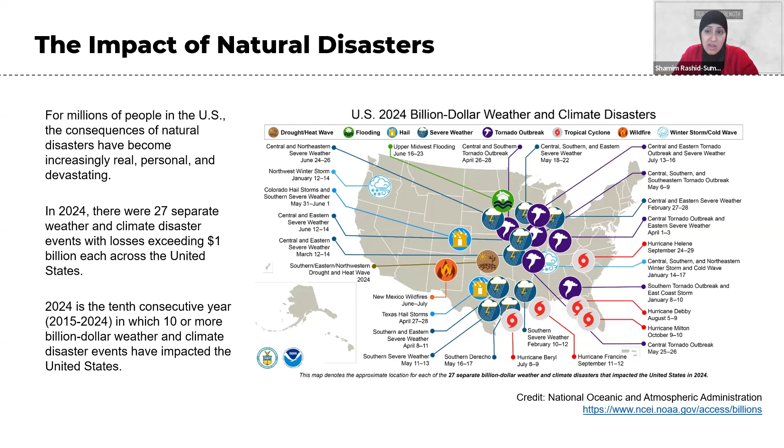There have been several years with 10 or more separate billion-dollar disaster events, including as far back as 1998, 2008, 2011 to 2012, as well as this 10-year period from 2015 to 2024.

However, across that last 10 years, 2017 was the costliest year on record for natural disasters in the United States, with a price tag of $306 billion.

In 2017, that was the year Hurricane Harvey broke a rainfall record for a single tropical storm with more than 4 feet of rain in Southeast Texas, and it matched Hurricane Katrina as the costliest tropical cyclone on record.

2017 was also the year Puerto Rico was mired in recovery after Hurricane Maria, and about 3,000 people were estimated to have died in that storm and its aftermath.

So we're going to talk a little bit about these different types of disasters and how each of those impact in the bigger picture. When we talk about wildfire, I have some statistics here on the cost of wildfires in the United States.

According to Verisk Insurance Solutions, just under 5 million US homes are at high or extreme risk of wildfire, and about 2 million, nearly half of those, are in California alone.

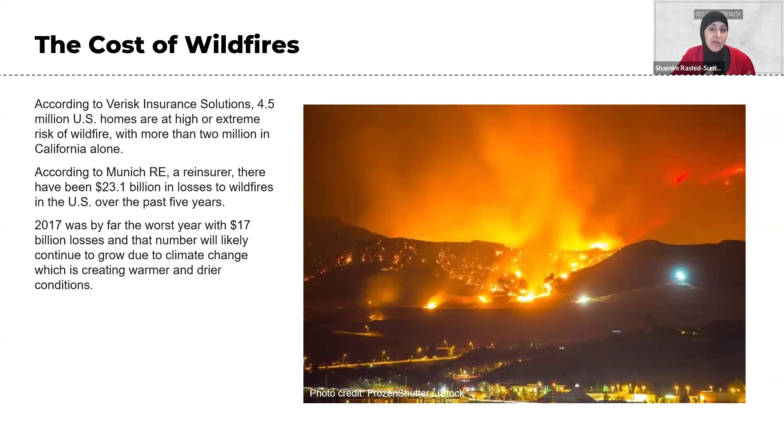It's estimated that that loss will continue to grow as we continue to experience different climate patterns, which create warmer and drier conditions year on year.

And so we continue to build in fire-prone areas. As we continue to do that, the damages caused by wildfire in those fire-prone areas will continue to increase. It's interesting that we continue to build back after wildfires.

Sometimes, instead of building back to higher standards, we see that policymakers will issue permits to rebuild without updating to the latest building codes, and sometimes exempting residents from zoning rules so that they can build larger homes and build back more quickly. Sometimes state officials have even mandated that insurance companies not raise insurance rates for people in fire-prone areas.

That means it just passes the cost on to homeowners elsewhere outside of those fire-prone areas. We've seen more recently an even bigger problem in that insurers will refuse to insure homes in hazard areas at all, and that's becoming true as well.

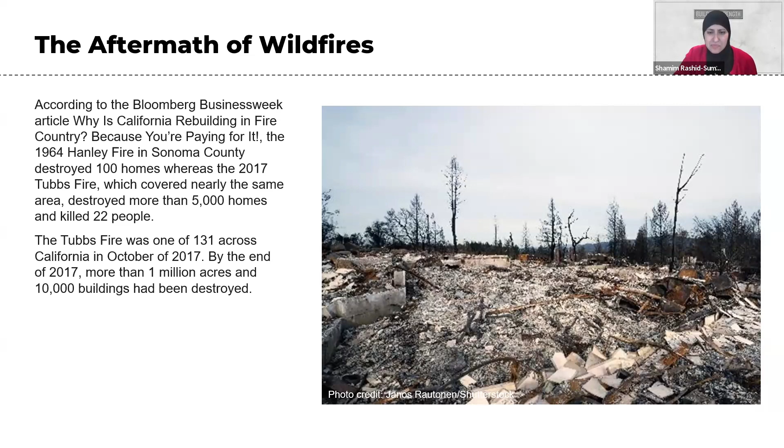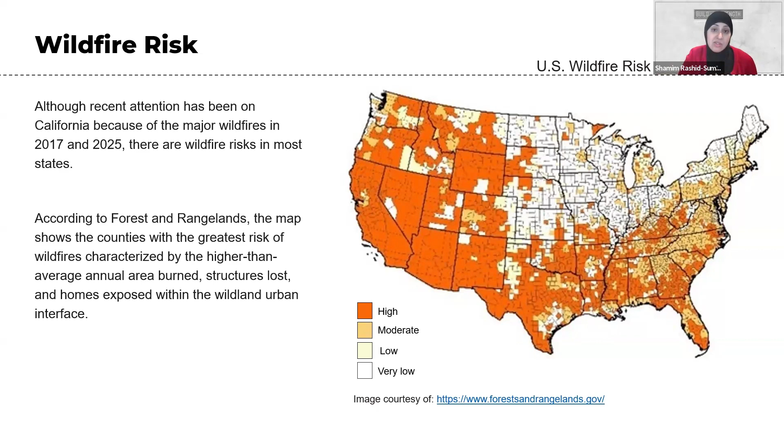And this is not a problem limited to the United States, I'm mentioning US statistics because that's what I have easiest access to, but wildfire is really an international problem. You have wildfire activity causing devastation in areas such as India, even in areas of the Middle East, such as Lebanon.

If you remember back to 2019, 2020, the Australian bushfire season of 2019 had hundreds of uncontrolled fires, which peaked in December, January. It was estimated that 46 million acres were burned and almost 6,000 buildings destroyed, including almost 3,000 homes. Sadly, over 30 deaths resulted from that wildfire season in Australia.

But if we switch now, not to just wildfire, but structure fires, according to NFPA, there were almost 500,000 structure fires in that 2017 year, causing just under 3,000 deaths, over 12,000 civilian injuries, and $23 billion in damage.

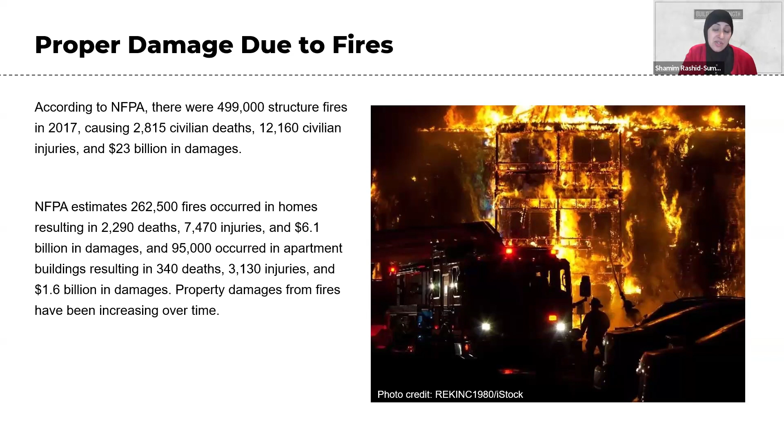So structure fires are a major problem. Property damages from fires have been increasing over time. And structure fires, whether they're caused by accident, arson, or wildfire, result in significant loss of life and property each year. Fire kills more Americans than all natural disasters combined. That's a very harsh statistic.

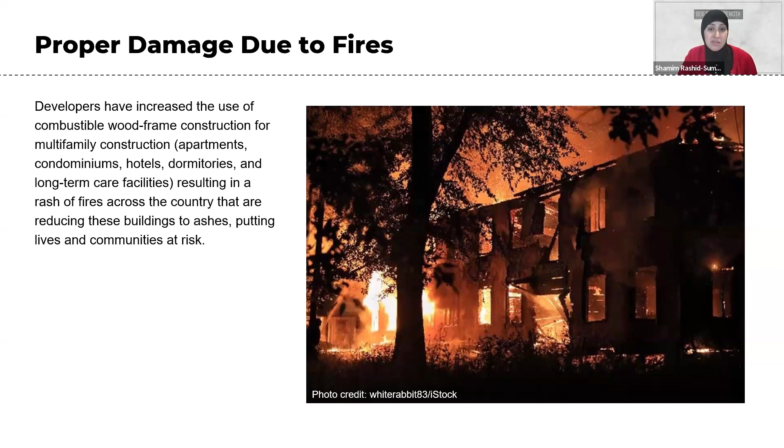As developers increase the use of combustible construction, this really impacts multifamily construction, including apartments, condominiums, hotels, dormitories, even long-term care facilities. There are a number of structure fires that continue, and these buildings, or groups of buildings, are often total losses, putting lives and communities at risk.

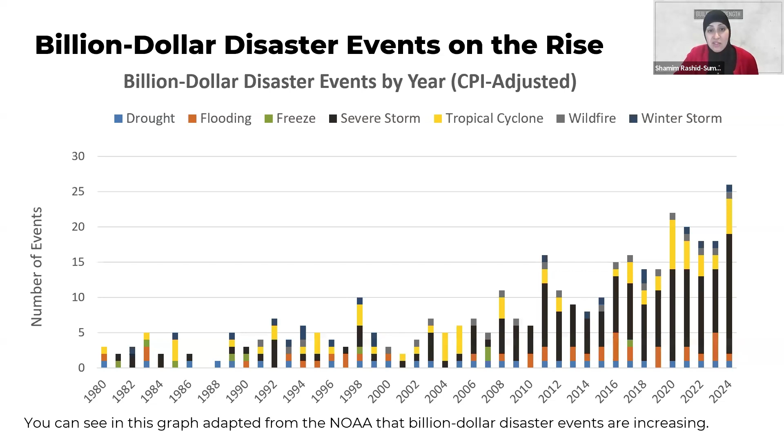So I have some more statistics to close off that picture of the impact of natural disasters. This is a graph adapted from the National Oceanic and Atmospheric Administration, and it shows that the number of billion-dollar disaster events are increasing year on year, and also the cost of those events. So there are more events and they're becoming more costly.

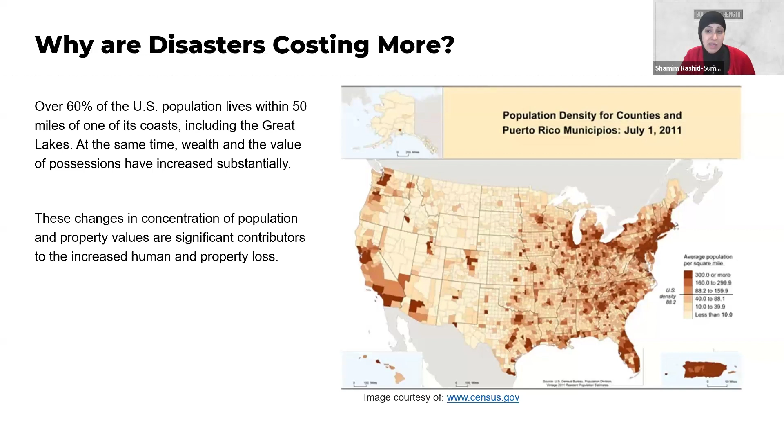So why are disasters costing more? According to the US Census Bureau, over the last several decades, the population in the United States, and we would assume this follows trends globally, has increased and then migrated towards the coasts—concentrating along earthquake and wildfire prone Pacific coast, and also along the hurricane prone Atlantic and Gulf coasts to the south.

So we've talked about what the impact of natural disasters are, how deadly they are, how costly they are. We're going to transition now to something a little more positive, looking at what resilience is, defining resilience, and taking some resilience-based approaches to hopefully mitigate those losses.

So there are several definitions of resilience. If you looked in the dictionary, the definition would be the capacity to recover quickly from difficulties, and toughness.

I particularly like the definition from the Urban Land Institute. This defines resilience as the ability to prepare and plan for, absorb, recover from, and more successfully adapt to adverse events—looking to address changes in the environment, whether natural or man-made, and actions to mitigate the negative effects and adapt to those changes. There are different components of resilience impacting social well-being, environmental sustainability, as well as economic development.

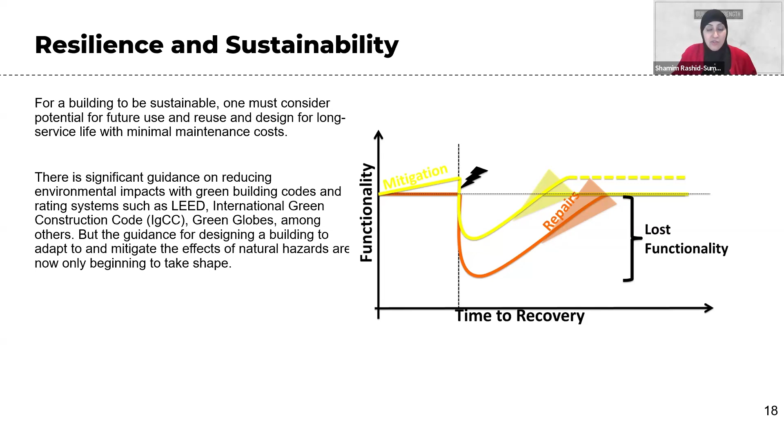Brian Meacham and Dr. Margaret McNamee conducted a study on the fire safety challenges of green buildings and attributes, done in coordination with the Fire Protection Research Foundation.

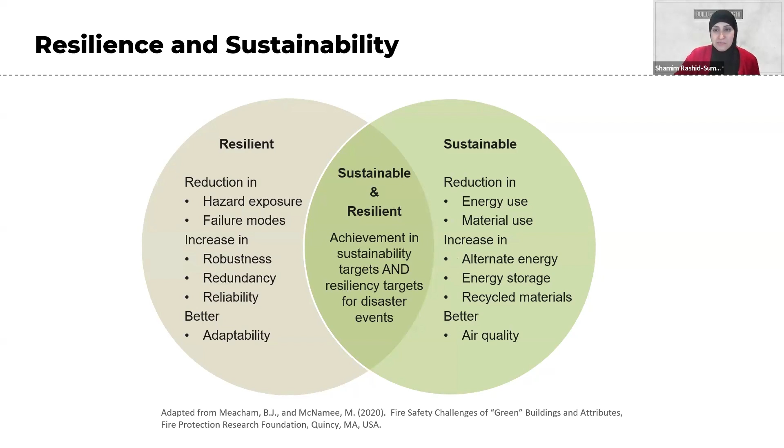On the resilience side, we're looking at reducing exposure to hazard, reducing the multitude of failure modes or the probability of failure modes, increasing robustness, redundancy, reliability, and better adaptability to change. If we're looking at disaster events, the target is to achieve both sustainability and resiliency goals.

One final way to look at resilience-based design: many of us are used to concepts of prescriptive or code-based design, and over the years there's been an evolution to performance-based design. In time, hopefully, we are evolving to resilience-based design.

Code-based prescriptive design really considers only the design and construction phase of a building's life, focusing primarily on life safety, keeping in mind actions or design choices that might be capital intensive. It's very prescriptive, based on code requirements, and usually looks at an individual building in terms of design and construction phases only.

Performance-based design is still mainly focused on building design and construction, not the life cycle of the building. But in addition to safety, it looks at potential damage and recovery as part of the performance requirements. It's not just looking at required capital, but also occasional impacts on insurance, and performance-based design will sometimes consider the insurance industry as a stakeholder. There will be some advanced analysis done in addition to prescriptive provisions, still focused on individual buildings.

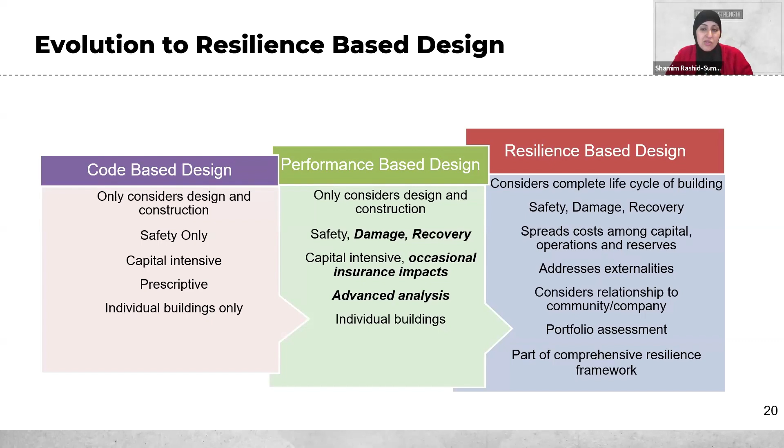Now we'll get to the meat of the presentation: what are the steps we can consider for disaster resilience? How can we incorporate disaster resilience into our design and planning process? There are a number of steps to consider.

There are two camps: voluntary programs, where communities or building owners voluntarily reduce their risk of natural disaster through enhancements in structures, warning systems, and education; and the mandatory approach, including building requirements so that communities and building owners are obligated to design their buildings and infrastructure to be more disaster resilient. We're going to look at four different steps today.

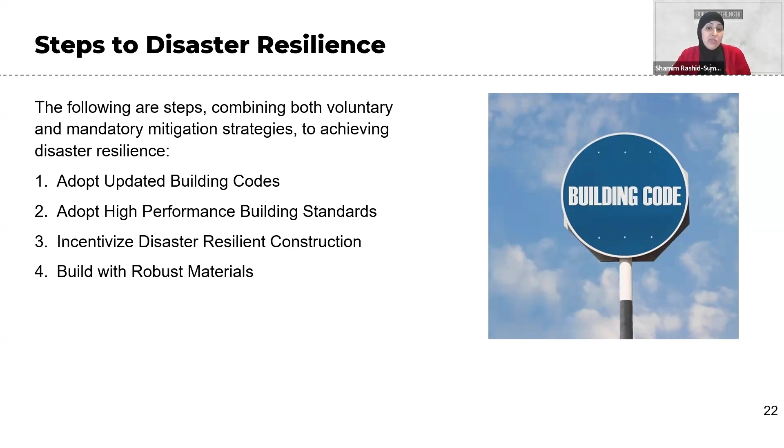On the mandatory side, the first step is adopting updated building codes, then adopting high performance building standards. On the voluntary side, we'll look at ways to incentivize disaster resilient construction, and also voluntarily building with more robust materials.

As a first step, adopting updated building codes is always the first step in disaster resilience. There's a common misconception that if you build to the building code adopted in your jurisdiction, you are building resilient. But building code minimum provisions are really looking at life safety—your ability to get out of a building quickly—it does not necessarily mean you're designing your building to withstand an event long term, or for functionality, for resilience.

Those are not part of the scope of minimum building codes. However, if you are building to building codes, you're a lot better off than not building to building codes. And if you're building to updated building codes, you're better off than building to codes that might date back to 2015 or 2017, which we do have in some jurisdictions in the United States and perhaps globally, as jurisdictions struggle to go through the process of adopting updated building codes. But that really is the first defense, and encouraging your jurisdiction to have a regular adoption cycle is the first step to achieving resilience.

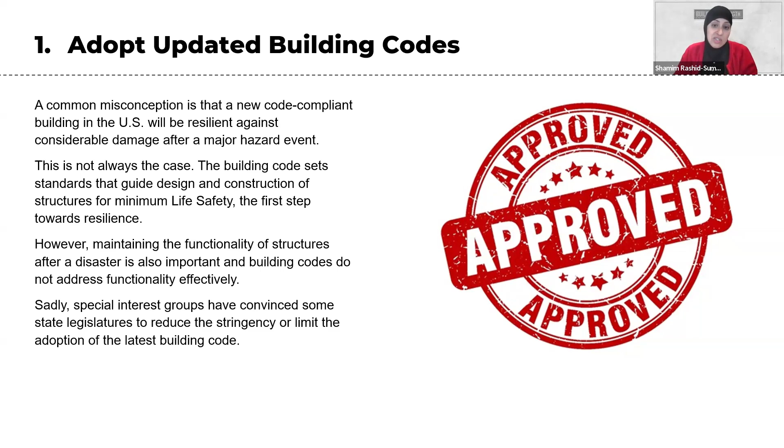The next level would be looking to adopt high performance building standards that go above and beyond minimum code requirements. There are a number of programs and standards aimed at incorporating resilient building techniques into construction on top of what building codes require, to provide a more optimum level of protection against natural hazards. So we'll look at a few of these: enhanced building codes and standards, the Fortified program, and building rating systems such as the U.S. Resiliency Council, REDi, and RELi.

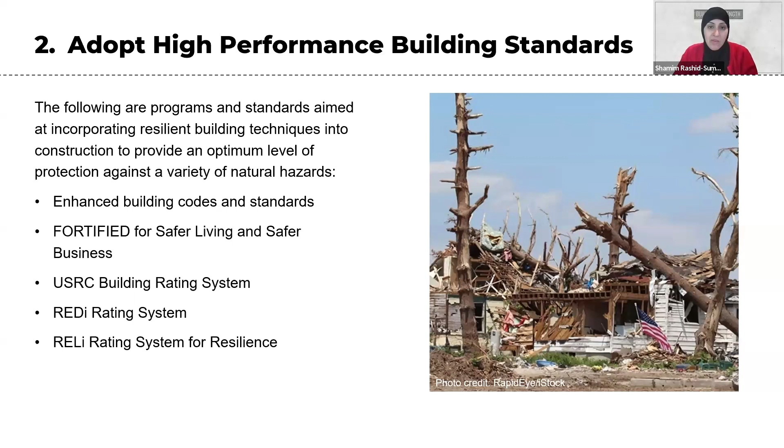When we're talking about high performance building standards, enhanced building codes can be developed and adopted through, for instance, building code appendices. There are appendices provided to the International Building Code and the International Residential Code already, to offer supplemental criteria to provisions in the main chapters of the code.

I have an example here of a jurisdiction that offered what they call Appendix N, a disaster resilient construction appendix. This was adopted in the state of Georgia as an addition to Georgia's adopted and amended International Building Code. They adopted this Appendix N after damaging windstorms experienced in 2008. That is when the Georgia Department of Community Affairs created this Appendix N to the IBC, as well as their adopted International Residential Code. Both of those codes form the Georgia State Building Code.

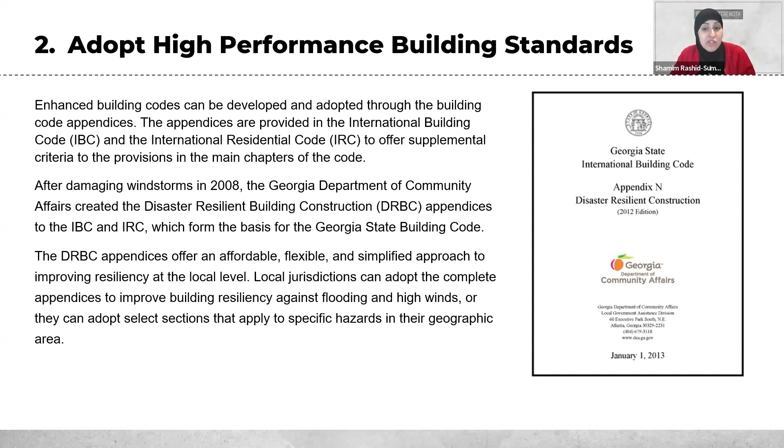This Appendix N attempts to offer an affordable, flexible, and simplified approach to improving resiliency at the local level. Local jurisdictions can choose to adopt the complete appendices to improve their building resiliency against flooding or high winds, or both, depending on what they experience in their jurisdiction. Or they can just adopt certain sections that apply to specific hazards in their geographic area. But this appendix allows them to mandate some provisions above what minimum code requirements would be.

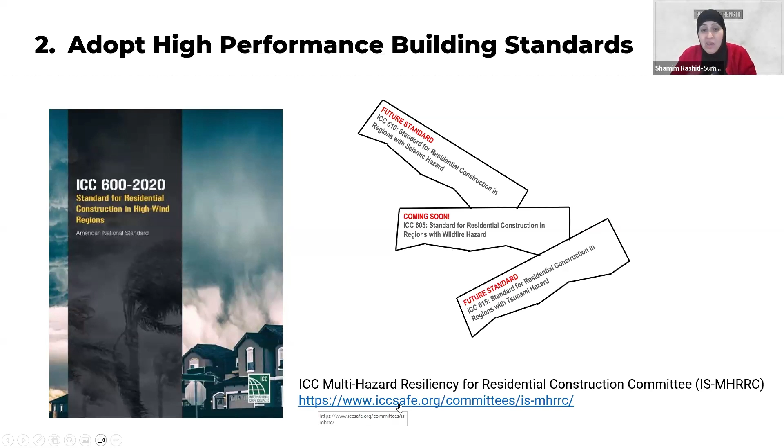There are other high performance building standards available. One was developed by the Insurance Institute for Business and Home Safety: the Fortified for Safer Living and Safer Business program. These programs provide enhanced design criteria above code minimum provisions, and also include construction and inspection oversight to make sure that what was designed is actually installed and constructed in the buildings. IBHS is a not-for-profit research and communications organization that works closely with the insurance industry.

There are several states that recognize Fortified and mandate that insurance companies provide lower premiums if you adhere to the Fortified program. I'll go over that a little bit later when I talk about incentivized programs.

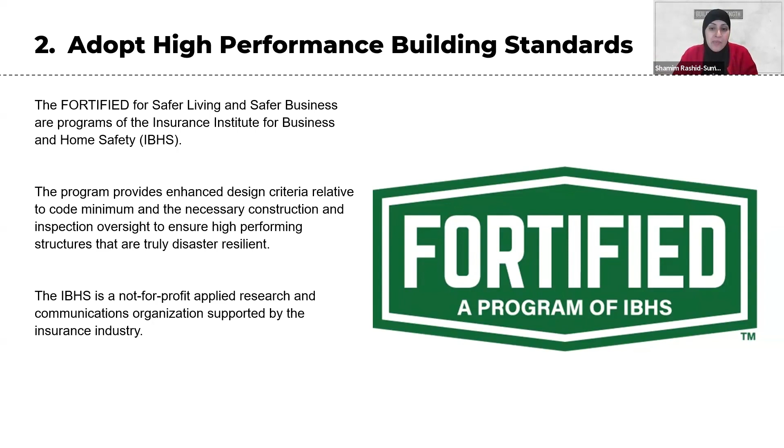And the U.S. Resiliency Council, through their USRC building rating system, is another high performance building standard. USRC is an organization looking to improve sustainability and resiliency of buildings during earthquakes and other natural hazards. They have a rating system based on 1 to 5 stars, looking at the dimensions of safety, damage expressed as repair costs, and recovery expressed as time to regain basic functions.

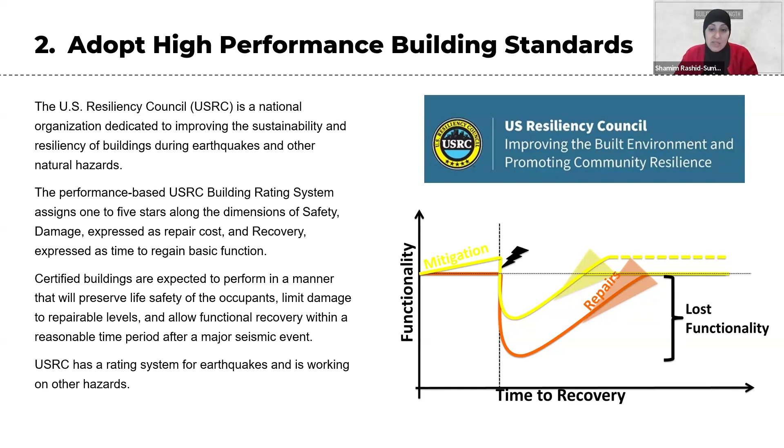There are two other rating systems: REDi, the Resilience-based Earthquake Design Initiative rating system, which looks to minimize building damage and promote contingency planning for utility disruption and other threats to functional recovery. Success in meeting specific monetary loss and recovery time goals is demonstrated by performing a modified FEMA P-58 loss assessment, developed specifically for the REDi rating system.

The RELi standard is another point-based system, adopted by the U.S. Green Building Council. It includes many credits for building to the LEED standard, as well as credits for risk mitigation choices at the building and neighborhood scale. It's intended to provide adaptability and resilience to weather and other natural hazards, in addition to complementing LEED's sustainable design standards.

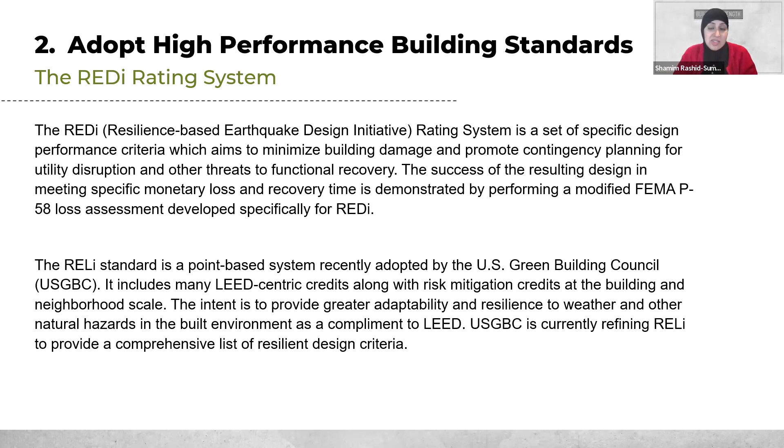So those were some involuntary ways to capture resilience or design for resilience. Now we're going to look at voluntary methods, the first of which is incentivizing disaster resilient construction. I have some insurance statistics here.

According to Munich Re, the insurance company, insurance companies took a $135 billion hit from natural disasters that occurred globally in 2017. I remember that was a drastic year in the United States, but it was also a drastic year globally, and many of those losses were in the United States.

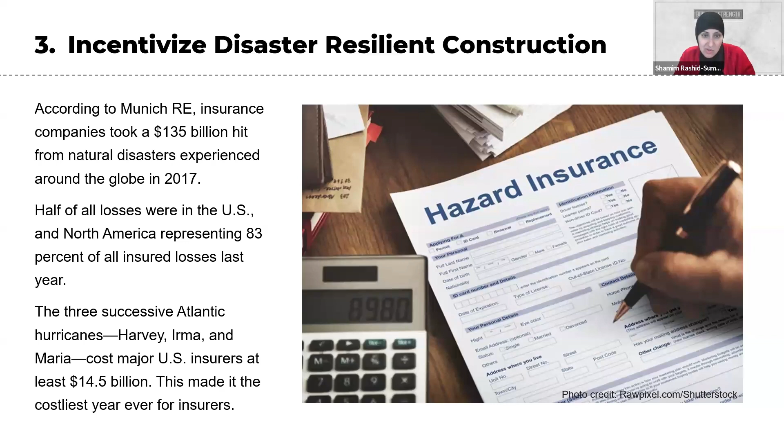When we're looking to incentivize disaster resilient construction, one way is to provide insurance incentives. I mentioned the Fortified program, which is a regulatory framework for insurance incentives. This is a way that states can encourage building owners to build resilient by legislating insurance premium reductions to policyholders if they build to the specific resilient design criteria specified in the Fortified program.

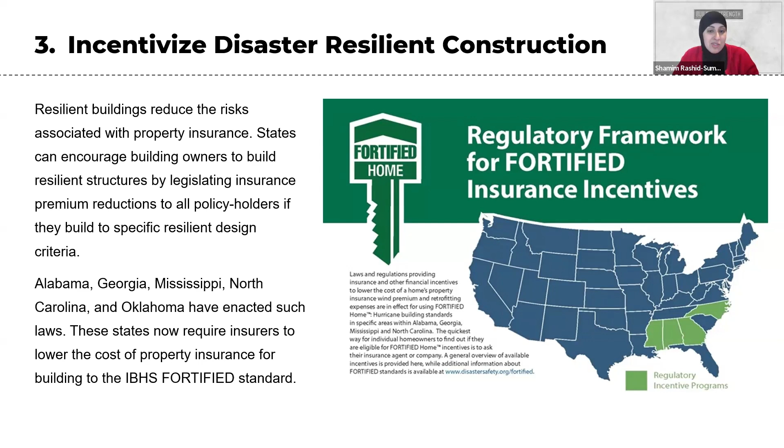A number of states have gone ahead and adopted this legislation. A few examples are Alabama, Georgia, Mississippi, North Carolina, and Oklahoma. They've all enacted such laws, and these states require insurers to lower the cost of property insurance if those buildings are built to the IBHS Fortified standard.

There are other ways to incentivize disaster resilient construction. This can be done through loan security by lending institutions, which would decrease business interruption and improve bond ratings for property owners and communities.

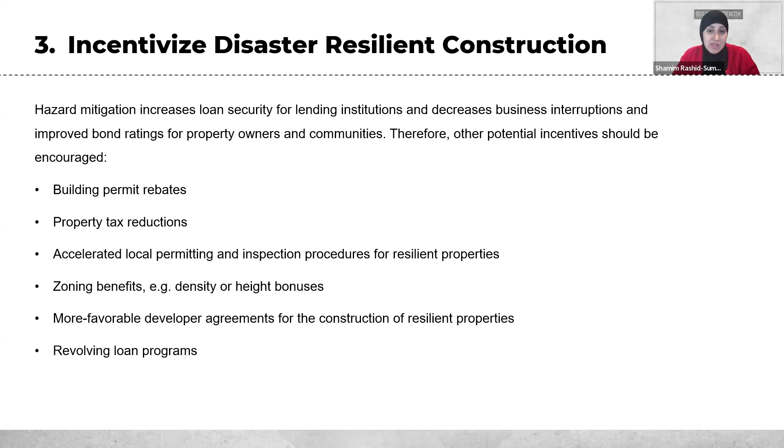Other incentives include building permit rebates, property tax reductions, having a pathway to accelerated permits if you're building resilient, providing zoning benefits such as higher density or height bonuses for buildings with resilient provisions, having more favorable agreements with developers based on resilient construction, and favorable revolving loan programs, particularly for buildings built to more resilient standards.

Finally, the last step towards disaster resilience is to build better, with more robust building materials. Some qualities of more robust materials include increased strength, resistance to water for resilience in a flood event or storm surge, seismic resistance to withstand earthquakes, fire resistance, greater energy efficiency, and more durability in terms of how long the building will stand.

Fire is one of the most frequently occurring disasters, and also the costliest and deadliest. The U.S. Fire Administration reports that every year fire kills more Americans than all other natural disasters combined.

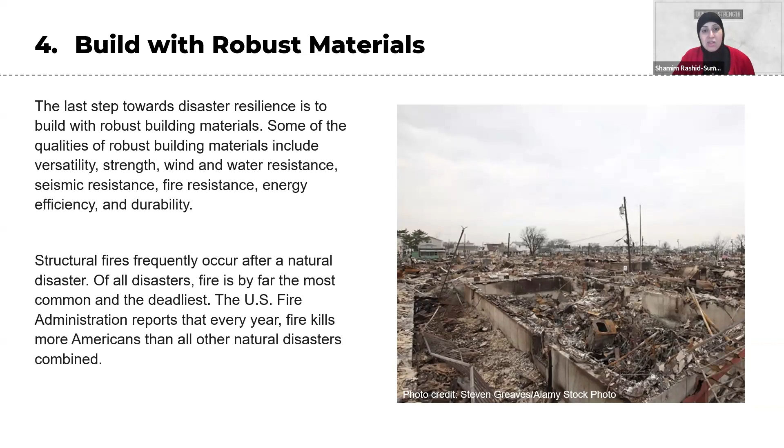I'm going to talk a little bit about what building with robust materials looks like. Obviously, I represent the concrete world, so concrete building systems are a good example of a material especially suited to provide resistance to natural hazards. It can withstand extreme weather, with hardness and stiffness in its mass to resist high winds and flying debris from tornadoes and hurricanes. Concrete is also non-combustible; it will contain fire and not contribute to its spread.

Reinforced concrete framing systems are an example of a way to design to resist not only fire, but the most severe earthquakes without collapse. And one other tidbit: concrete does not rust, even if it is subject to flooding. It does not corrode. Typically, if it has any metallic materials for reinforcement, it may, but any concrete that's reinforced with non-metallic materials often resists corrosion. And also concrete does not mold as well.

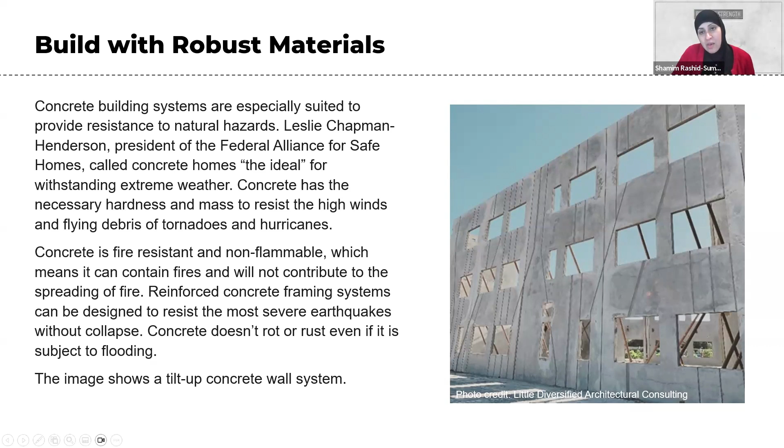On the right-hand side here, I have a picture of a tilt-up concrete wall system. And then one other concrete system that I usually like to highlight because of its many benefits. Some people are not aware of this concrete system, so I like to highlight it for that reason as well. And that is insulating concrete forms.

This is a unique concrete system because the forms that are used actually stay in place. They are comprised of EPS, which is expanded polystyrene foam insulation on both sides. So that foam comes as sort of a block assembly held together by these plastic ties. The blocks are put in place and then used to build a wall, and then the concrete is poured in between. And what this does, it builds in insulation to the wall.

So these forms will stay in place and provide continuous insulation. And then the way these ties work, they serve as furring strips, and they can be used to attach different finishes. So I often get asked about the EPS foam.

This foam is special. It is fire retardant, treated with fire retardants. This system itself has to pass a number of fire tests for surface flame spread, surface ignition, lateral and horizontal flame spread. So it is a heavily regulated construction method. And this also is tested as an assembly to ASTM E119. So it does also carry a fire resistance rating of anywhere from 2 to 4, or I've even seen higher fire ratings for this construction method.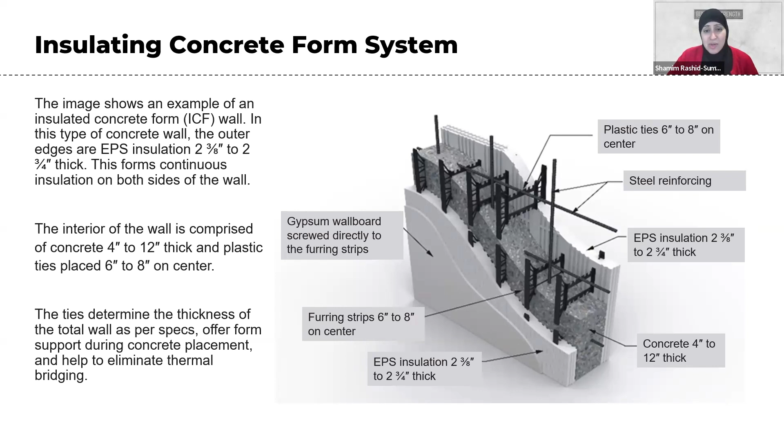So those are some examples of different robust systems and robust materials. We're going to move now to quantifying the benefits of resilient construction. There's often an argument that building more resilient using these robust materials is more expensive than building with traditional materials, more either combustible or less stiff materials. We're going to look at quantifying what the benefits are to provide that cost benefit to taking resilient measures.

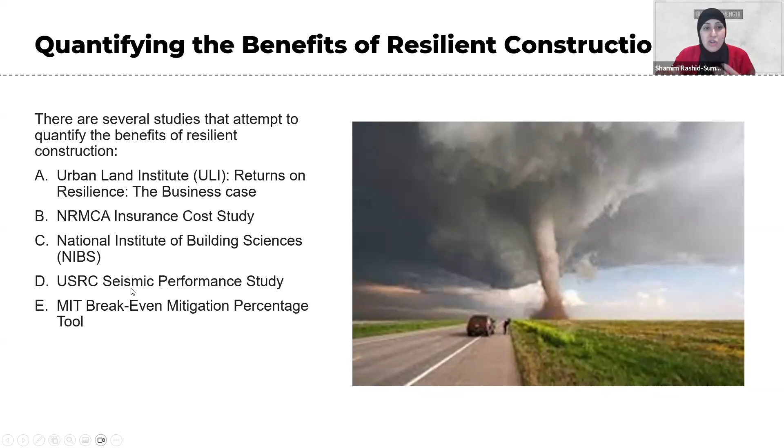There are a number of studies that are out there that look to quantify the benefit of resilient construction. I've picked out 5 that we'll talk about here today. There's the Urban Land Institute's Return on Resilience Business Case Study. NRMCA, my organization, did an insurance cost study. There are studies done by the National Institute of Building Sciences. There's the U.S. Resiliency Council Seismic Performance Study. And then there are other tools that are used, such as MIT, Massachusetts Institute of Technology's break-even mitigation percentage tool. So I'll touch on all of these very briefly.

The Urban Land Institute has a report called Returns on Resilience, the Business Case, and it explores the economic benefits of resilient construction. This study is based primarily on interviews with developers, property owners, and their consultants to identify the motivations that they had to protect their assets against climate-related threats, such as what resilience strategies were selected, what the design and development processes looked like for them, and ultimately how their projects perform. And in all cases, the projects were able to demonstrate economic justification for spending more upfront to design and build resilient structures. So the hazards that were addressed in those designs included inland flooding, drought, hurricane wind, and storm surge.

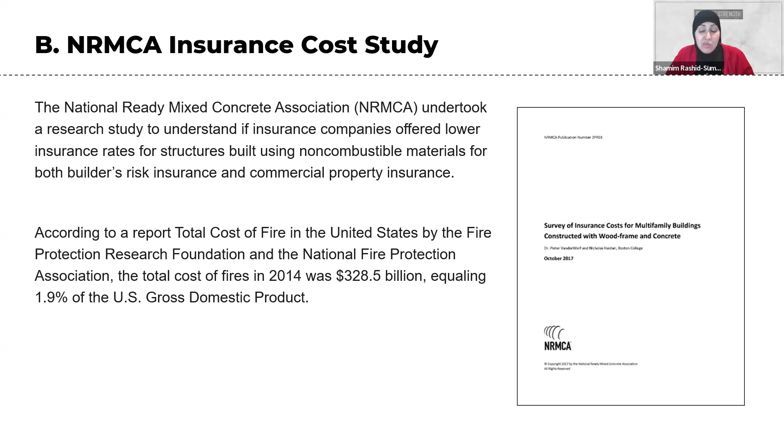NRMCA, as I mentioned, undertook a research study to determine if insurance companies were offering lower insurance rates or premiums for structures that were built using non-combustible materials versus combustible materials, for both builder's risk insurance and commercial property insurance. One of the main drivers behind this study, again, was the enormous loss in buildings each year due to structure fires.

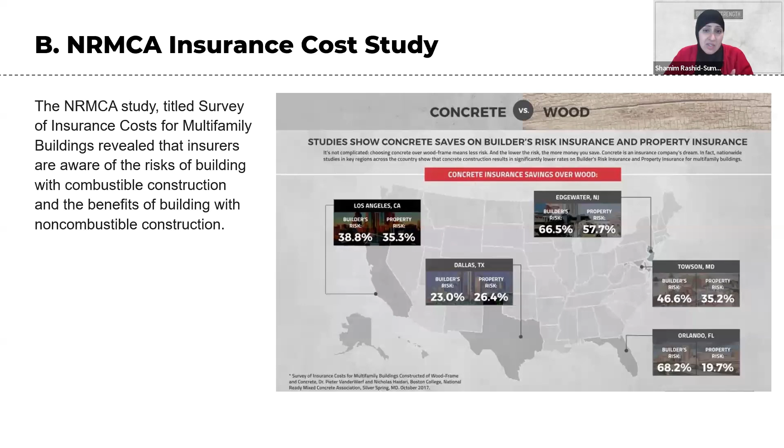According to the study, some agents suggested that the gaps in rates between wood frame and concrete would actually grow in the future, and that some insurers may even decline to serve as the sole insurer for wood frame apartment buildings. So we wanted to see if that would be the case. This study was done in 2017, and we did a refresh of that study in 2023 to see if that difference in costs was growing.

We partnered with the Concrete Advancement Foundation to recommission this insurance study in 2022 and 2023. This study again solicited quotes for a reference building, the same reference building used in both studies: a 100,000 square foot, 4-story apartment building in the same five reference cities. It asked for quotes for a wood frame apartment building and a quote for a concrete building.

In that study, you can see the gap between what those premiums were for combustible and non-combustible construction did grow. Once again, the insurance companies consistently confirmed that the cost of building insurance for a typical apartment building is lower when that building is constructed with concrete versus wood frame. This applies to both builder's risk insurance and commercial property insurance.

That difference was as high as 80% less in an area such as Los Angeles, which is subject to seismic events. The smallest difference, if you look at places like Dallas, Texas, it's a little bit less. Orlando, Florida, on the property side, was a little bit less.

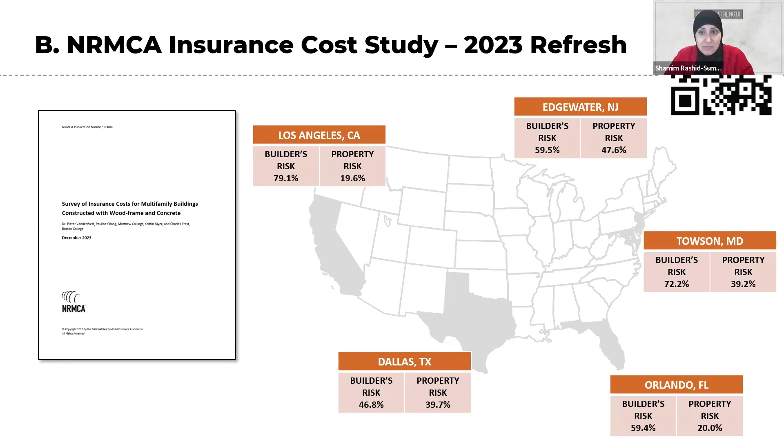There are a couple of other studies that I want to share with you. One is from the National Institute of Building Sciences, called Mitigation Saves, updated in 2019. This study looked at quantifying the value of designing buildings to exceed, at the time, the 2015 IBC or IRC for hazards—including riverine flooding, hurricane surge, wind, earthquakes, and wildfires—what would be the value for designing buildings to exceed minimum building code?

The results revealed that for every dollar you spent on building above code, the amount of money saved ranged from $4 to $7 for each dollar spent, depending on the hazard. For a riverine flood, if you spent $1, you would save about $5. For hurricane, you would save $7 from hurricane damage, and so on. The overall benefit to cost ratio: for every dollar you spend towards resilience, you save $4.

Some of the strategies looked at to exceed minimum requirements for the 2015 building codes included building new buildings higher above base flood elevation than required by the 2015 IBC for flood resistance. For resistance to hurricane wind, it looked at homes built to comply with IBHS fortified home hurricane standards. For resistance to earthquakes, buildings stronger and stiffer than required by the 2015 IBC. For fire resistance, buildings complying with the 2015 IWUIC, the International Wildland Urban Interface Code. The report also suggested that architects and engineers can help clients understand the potential risks associated with a project and determine an owner's risk tolerance and ability to mitigate those risks.

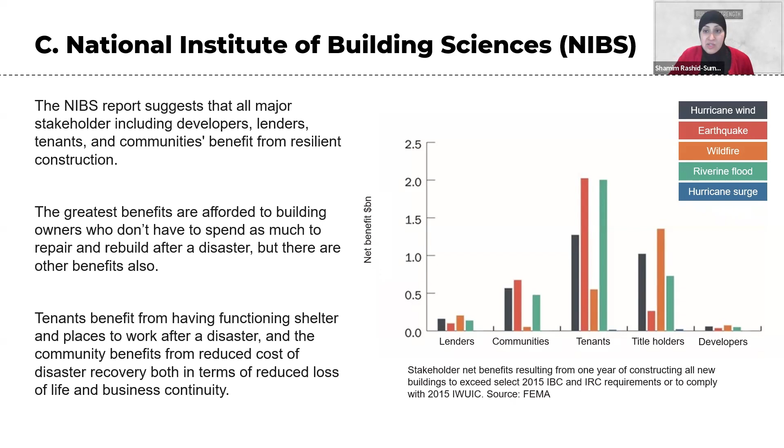It also suggested that major stakeholders, including developers, lenders, tenants, and communities, can all benefit from resilient construction. The greatest benefit is to building owners who don't have to spend as much to repair and rebuild after a disaster, and tenants can benefit from having functioning shelter, not having to be relocated after a disaster. You can download this report in full and read the Mitigation Saves report.

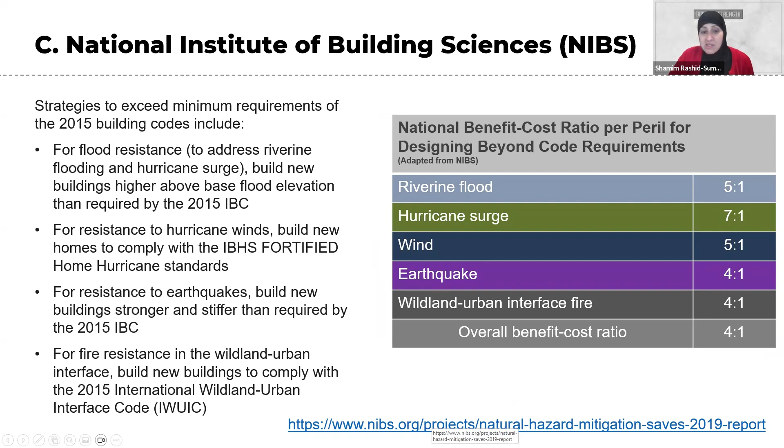Just two more studies that I want to share. One is the USRC seismic performance study, commissioned by the NRMCA. We asked the USRC to compare seismic performance of multifamily residential structures based on 4 different construction types: traditional wood framing, cross-laminated timber or CLT, steel framing, and concrete built using insulated concrete forms. This looked at the same multifamily building used as the reference building in the insurance study, but it looked at 3 different areas.

It looked at Los Angeles, which has high seismicity, also Seattle and Memphis, that have varying levels of seismic activity. The results of the study demonstrated that more resilient configurations, such as concrete construction, produced significantly higher lateral force strength and 4 to 5 times higher building stiffness than the other configurations.

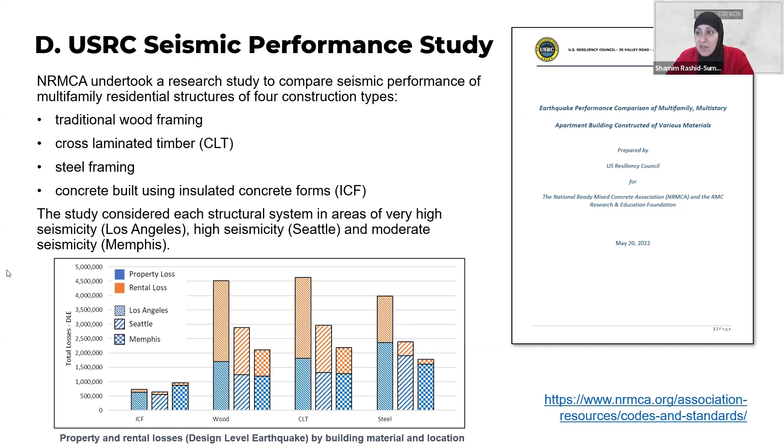The study showed that property losses in a design level event were approximately 170 to 270% higher for the wood, CLT, and steel configurations as compared to the concrete configuration in Los Angeles and Seattle, and a little bit lower, 40 to 85% higher, in Memphis. You can see that in the graph on this slide.

And then finally, there's this MIT break-even mitigation percentage tool, which you can look up online. That's looking at the full life cycle of the building, not just the building itself, but also energy use, wear and tear, hazard repair, and what the end of life looks like, including waste recycling, labor, equipment, and energy to demolish a building.

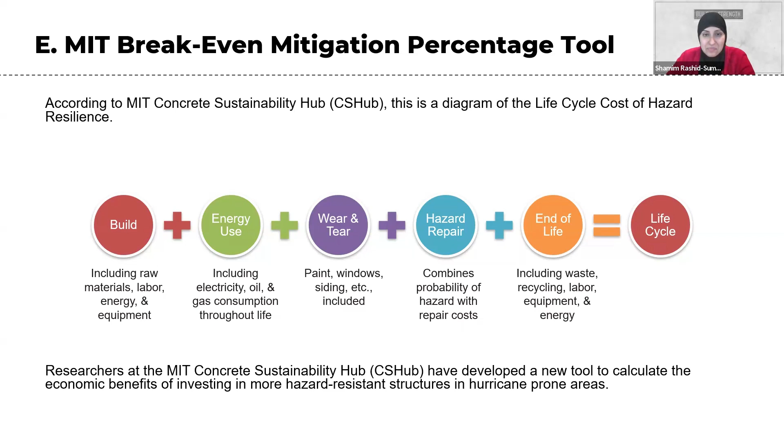This break-even mitigation percentage tool evaluates the cost effectiveness of mitigation for a building in a location by factoring in the expected damage that a conventional building designed to code would endure over its lifetime. Then it compares that to the cost of a more resilient, enhanced building designed to a higher standard. You can see this comparison of what the value would be over the present value of life cycle cost.

It would be $800,000 for a conventional building versus the life cycle cost for an enhanced building built to resilient standards, which you can see is in the $500,000 range. This is an example for a 2-story wood frame single family home in New Orleans, looking again at what hazard repair, improvements, maintenance, energy, and initial cost would be.

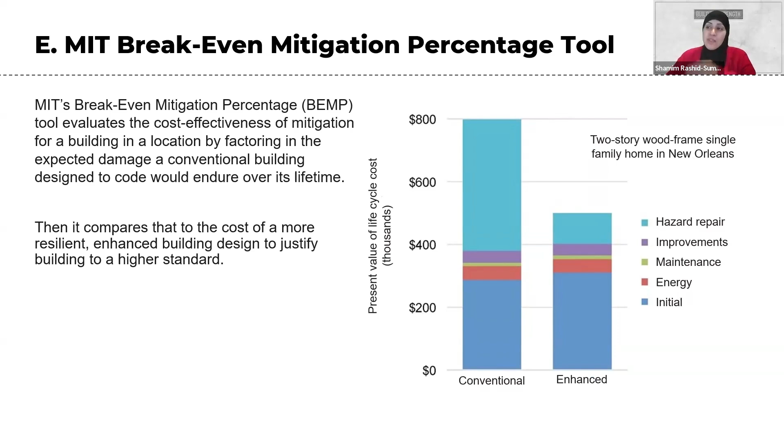Okay, so hopefully that gave you an idea of some of the approaches to building resilient, the standards to building resilient, different building standards, and again what the cost benefit analysis, what that cost argument is to build resilient. I do have a few case studies, which I'll try to go through quickly.

Or Imad, should we break for questions? You're on mute, so I can't hear you. I'm sorry, I still can't hear you. You're muted. Okay Shamim, please go ahead and continue with the case studies, and we'll have a few minutes for Q&A.

Thank you, okay perfect. So I've picked out a few case studies to show what resilient construction looks like in practice. The first one is a case study in Miami, the Brickell building. When it was being designed, Miami was recovering from the impacts of Hurricane Wilma, and many high-rise buildings in Miami suffered extensive damage and were out of commission for extended periods in this area. So the developer was willing to increase construction costs if he could build to withstand those types of events in the future, to realize that long-term operability.

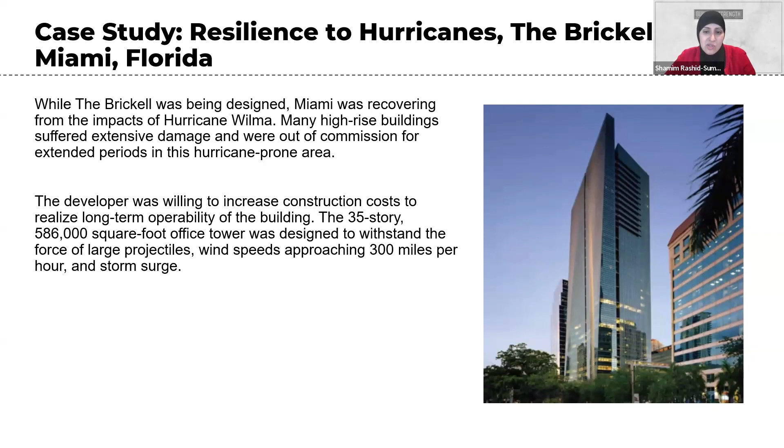And then the next case study I have is regarding a site in Milwaukee. This is Walker's Landing. This is a pretty typical building, two buildings, residential, 6 stories each, 4 floors of residential over 2 floors of parking. But the site had restrictions: there was a 10-foot setback from a river, and a bridge on one side and 2 streets on the other.

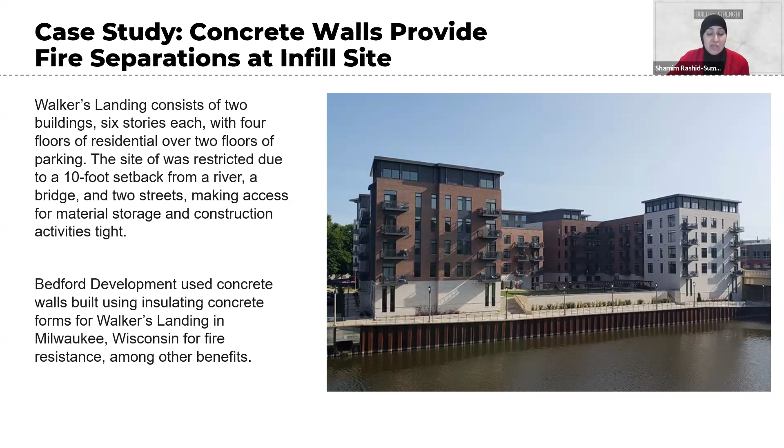So it had setback requirements for fire resistance rating, and also challenges with access for material storage and construction activities. So this was built using concrete walls, insulated concrete form walls, to get that fire resistance, among other benefits.

Because this was on an infill urban site, again requiring fire rated exterior walls, they chose to go with concrete. It was a cost savings over fire retardant treated wood. The developer also chose ICF walls and precast hollow core floors for thermal efficiency. This is in Wisconsin, a very cold climate, and also for speed of construction.

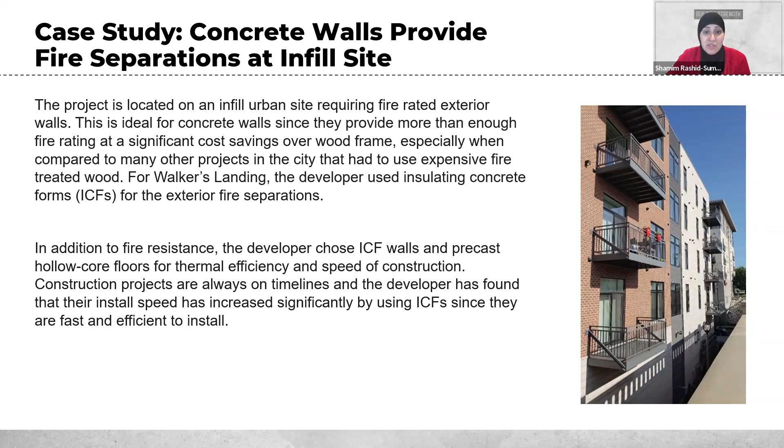So this was one other case study. My favorite one - it's not a great story, it's a little bit sad, but my favorite case study because this is in Harlem, East Harlem, New York. This was a concrete apartment building that survived a blast. This happened in 2014. There was a natural gas explosion.

It happened right next door to this concrete building - hopefully you can see my cursor. There was a massive natural gas explosion that actually destroyed this building and another building beside it. Four neighboring properties had to be vacated because of the debris. It shattered windows even blocks away. Some of that debris landed on the elevated subway tracks - in this area of New York City, the subway is actually elevated above grade. So this shut down travel to and from Manhattan for the day.

This explosion was big. It resulted in 8 deaths, 70 injuries, 100 displaced families, and a massive emergency response - over 250 firefighters, paramedics, and police officers responded. This made history, it was in the news. The local utility, Con Edison, was found responsible for that gas explosion and for over $150 million worth of damages. But the good news story here is this ICF building actually survived that explosion. The New York Department of Buildings report acknowledged that this was remarkable considering it was inches from the explosion. The other buildings were not so lucky.

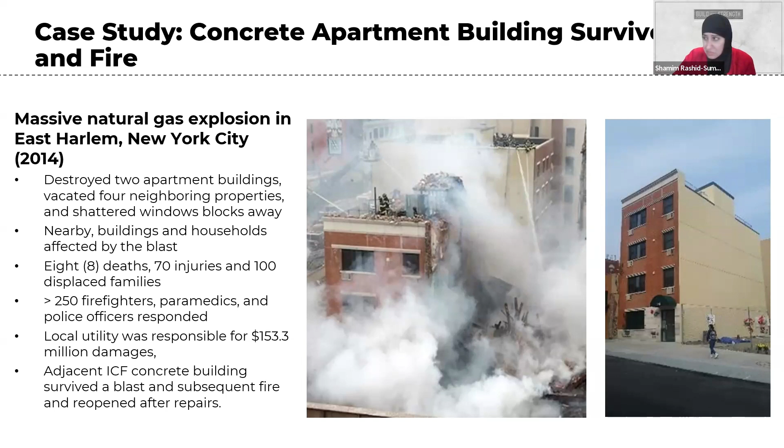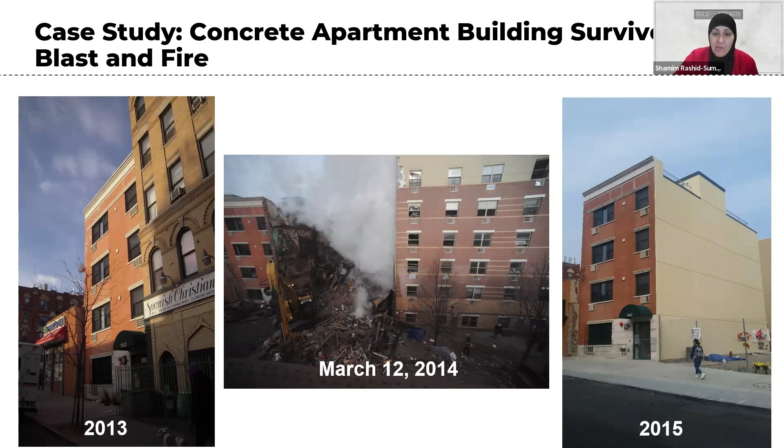These reaction blocks don't have any exterior cladding, they're just ICF boxes. They were subjected to blasts from a 50-pound charge of military grade TNT at distances ranging from 6 feet to 40 feet. Based on these tests, there was limited damage observed to the structure, so they passed the tests. What's happening is that the insulation, the expanded polystyrene, is absorbing energy from the shock waves and dissipating the energy over time, cushioning the concrete so that it is not impacted by the explosion.

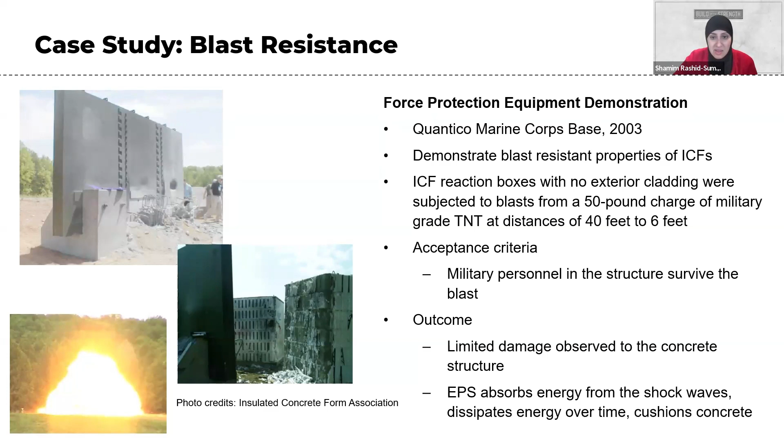The final case study I have is from a wildfire where non-combustible exterior finishes saved a home from a devastating wildfire. This was in Laguna Beach in 1993, a wildfire pushed by the Santa Ana winds. It consumed 17,000 acres, destroyed almost 400 homes, and damaged 500 more in a single day. There was a huge demand on the water district's system as the fire was being fought. Reservoirs were being drained faster than they could be filled, and 6 of the district's 22 reservoirs were completely drained during the fire. This wildfire consumed approximately 16 million gallons of water over normal usage needed during that period for battling those fires.

But in this devastation, you can see this one house survived. It was protected by an envelope of non-combustible materials, spared due to not only the construction but the landscape design. The detailing included stucco cladding on the walls, a Class A concrete tile roof sealed on the ends to hide any exposed wood under the eaves, which prevented combustion of the home. It also featured double pane glass, which helped keep heat from igniting draperies inside the house. There were landscape zones of plants more resistant to fire than normal vegetation, and the property had no tall flammable trees near the house - a defensible space that spared the home.